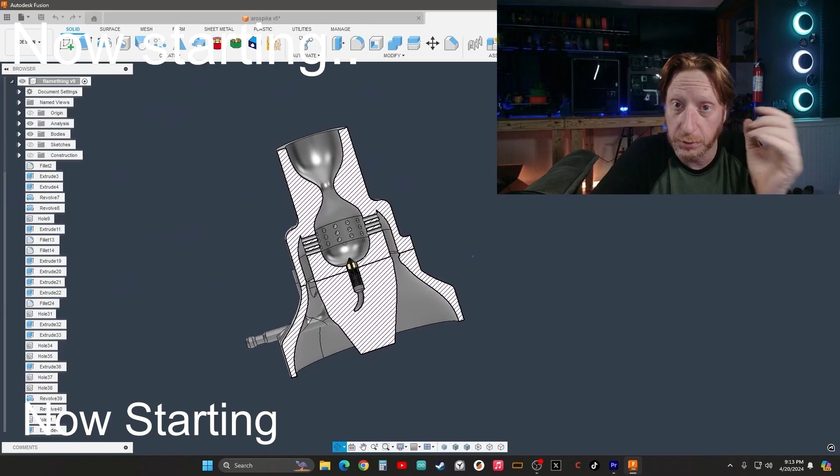Nozzle heats up and the plastic it flows. A creation takes form as the live stream goes. Heart of a maker with a tech-savvy show. Designs in the making, see the hotbed aglow. It's shenanigans 3D on the digital stage. With each layer printed, he's the maker.

Let's start the show. Layer by layer, we watch it grow. A twitch in time with shenanigans flow. Chaos reigns with a fiery glow. We're live. We crash. Watch closely as the filament spins. A wild ride where the line between fails and wins. Accidental art when the plastic rebels. Shenanigans 3D, he's breaking all the levels on the edge of tech. Where the sparks may fly in the streamer's den. There's no limit to the sky.

Every stream's a gamble, roll the fiery dice. Pushing limits, bending rules, not one to think twice. Heartbeat pulses with each print he creates. While the chat's wild wonder in suspense they wait. Rising with the flames in the shenanigans game. Printing out the future, no two prints the same.

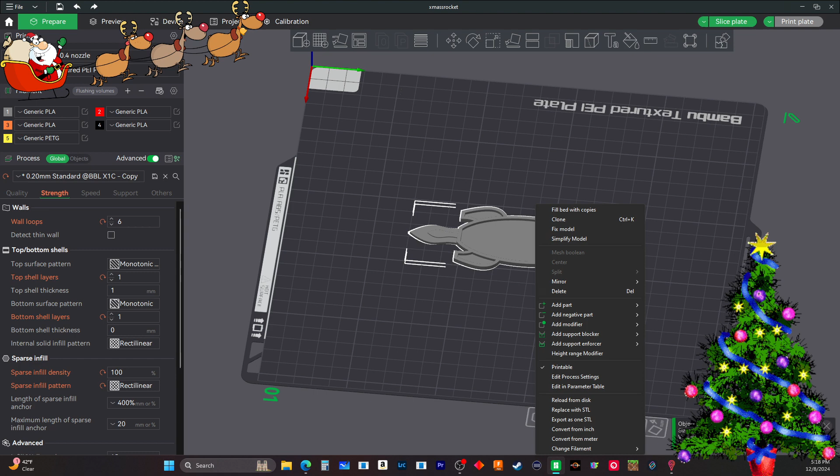Let's get my screen up. We'd have to figure out what kind of board we have to use, though. Would we have to use a board with 2 extruder connections? Would we have to do that? How would we be able to control it? See, this is why I wanted to do the hangout today. Well, I attempted to do the hangout, so again, I apologize.

Completely fell asleep. But...

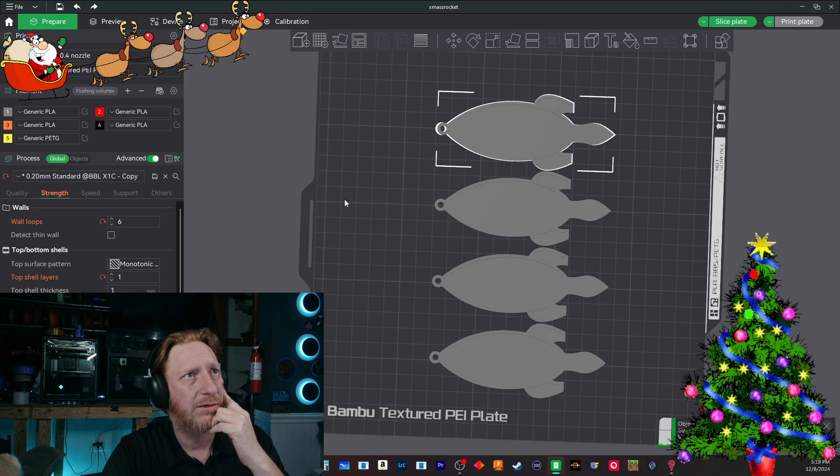Would we need to have a board? Like, what kind of board can we use? We'd have to have a specialized board that has dual extruders. Yeah, extruder is just a stepper motor. But if you look at boards, like in the software, I'm talking about the software end of it. Well, we probably wouldn't. We would probably want to go with Arduino or something, huh?

What orientation did I put these in? That way.

We probably would want to, because we need 2 steppers for the 2 extruders, right? Nick 3DP, use the dual Z motor slot, yeah. We'd probably need 3 slots, right? 2 for each filament, and 1 for the roll to wind the roll up.

It has 3 steppers. Yeah, so we'd need 1 per filament. So there's 2, and then we would just need 1 for the spool to wind it.

Well, we would need to wind it up, right? How are we gonna wind it? How are we gonna put it on the spool? If we have the spool slowly winding to gather up what? Yeah, I don't know.

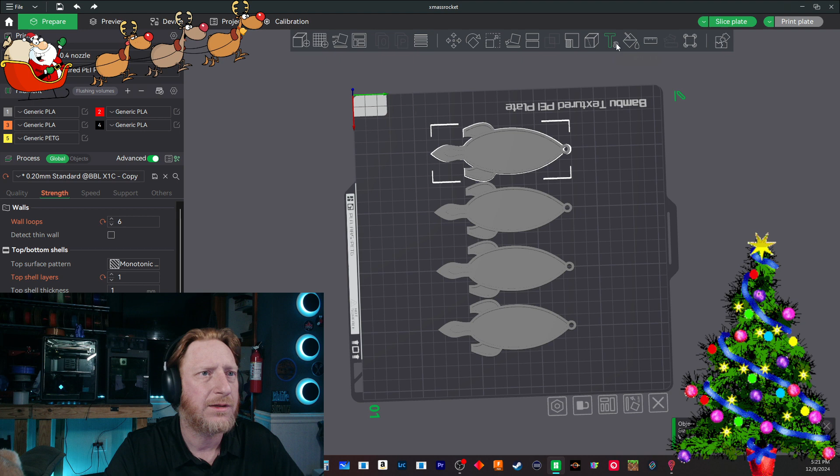The other thing I was thinking about is, how should we cool it? Can we cool it? Should we blast air through it to cool it, like when we pull the extrusion, when we pull the dual colored part, the end of it?

That's a good one. Okay, yeah, show that to me then.

Yeah, the dogs are kind of a little bit wild today for some reason.

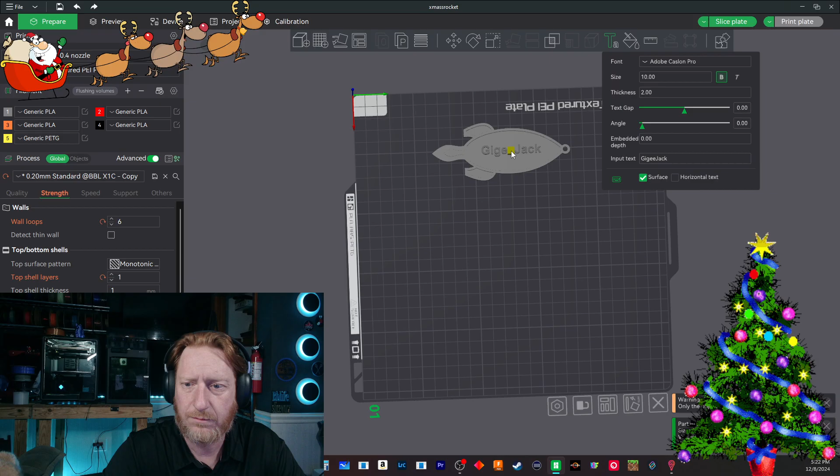Do we need... yeah, I know. So the whole thing is going to come straight down, right? So we're going to have the 2 rolls of the sample filaments that we're going to combine together up on top. It's going to go through the extruder, come straight down. I was thinking about having an air jet kind of cup thing. We'll 3D print an air jet kind of thing, and it'll go down through that to cool it. And then it'll come down.

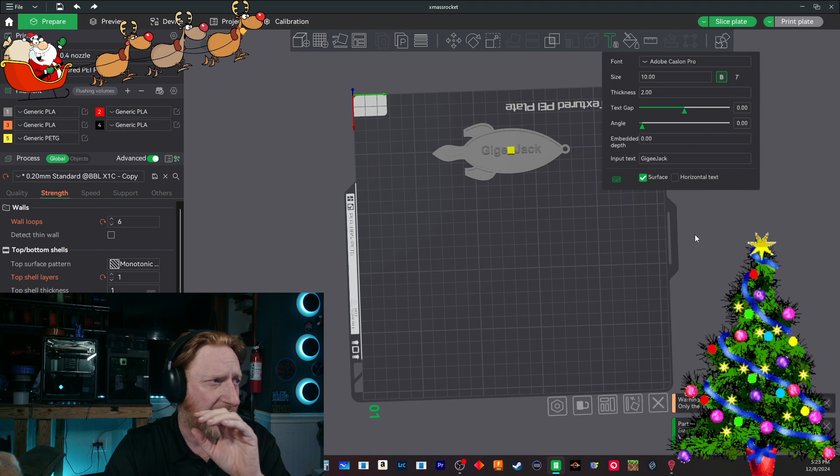I want to have some way of maybe having a 3rd hot end that's not quite fully up to temperature to melt it, but just enough to deform it, so we can push it through that to make sure it's at 1.75, and then from there it'll go into the coil to get wound up.

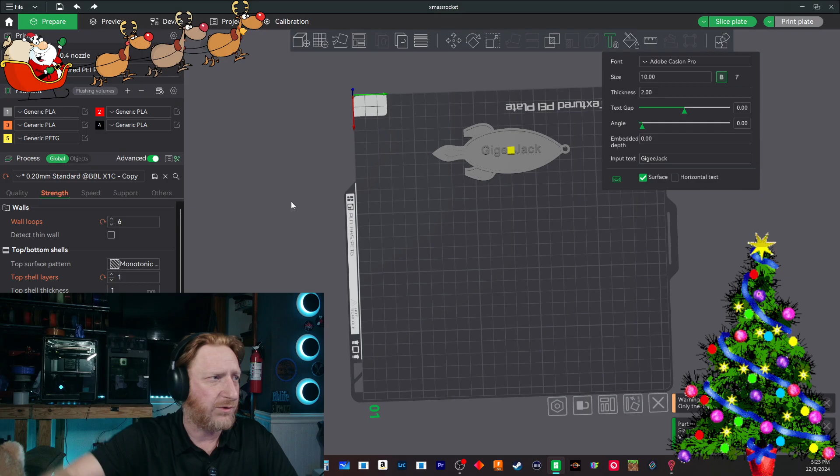So yeah, it's beautiful, I know.

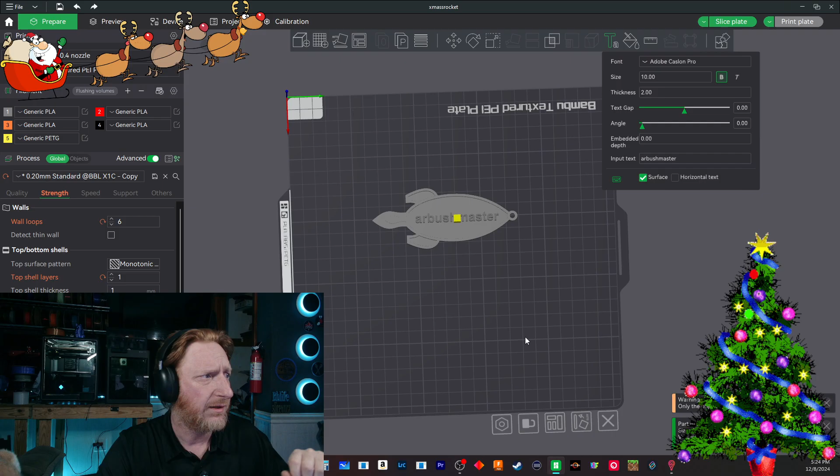Some kind of special rollers to get the diameter right. Yeah, see, what I'm hoping to do is we can use one - they make one, I'm pretty sure. I think they make 1.75 nozzles, and then we can extrude that at 1.75, go through the cooling and go through another hot end, another 1.75 hot end that is just hot enough to deform the plastic a little bit. That's my idea.

And I think instead of using a controller, we could probably just use an Arduino and do that, which means I have everything. The only thing we need to get is the 2-in, 1-out. That would be the only thing we need to get, and I can probably have that here this weekend. They have them on Amazon for like $17.

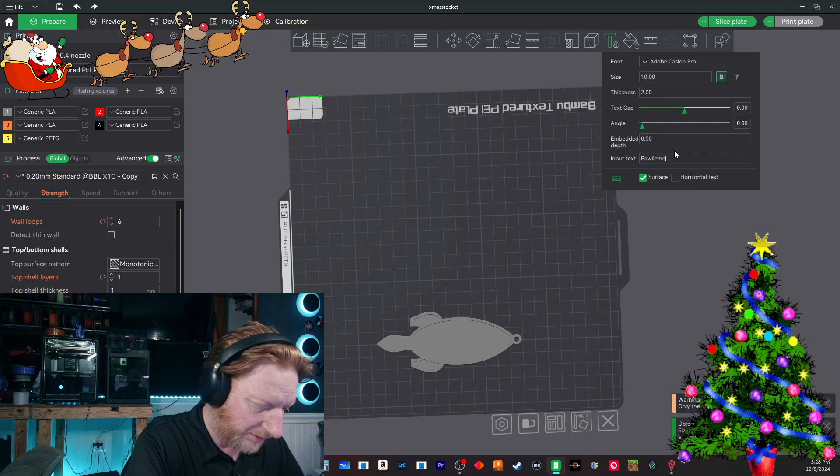So with him saying that it works, I think we should move forward with making a 3D printed xylophone out of Polymaker's new PPS CF.

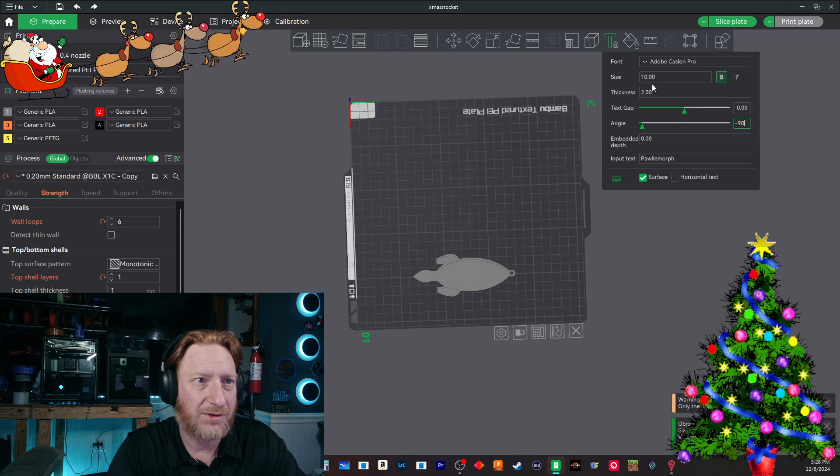What do I have running in the background that's causing my computer to spool up? Well, we'll pause that.

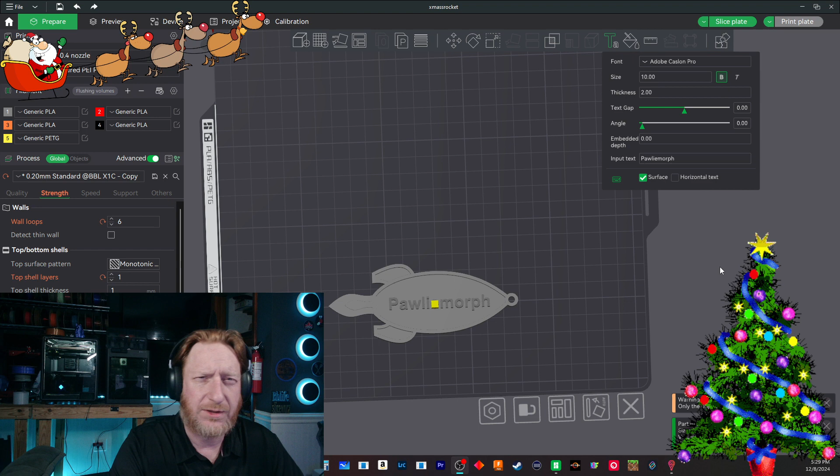I'm downloading a bunch of videos off my YouTube channel, a bunch of shorts. I'm redoing my, we have this 'be right back' screen like that right there. So I'm redoing it. I'm going to have it so it plays, while I'm gone, a bunch of my 3D printing clips, my YouTube shorts on 3D printing. Usually the time lapses and stuff that I did, which I want to do again. I want to get back into doing time lapses. I had a whole entire rig set up. And I think when we move the studio into the bigger room, I'm going to set up a little section.

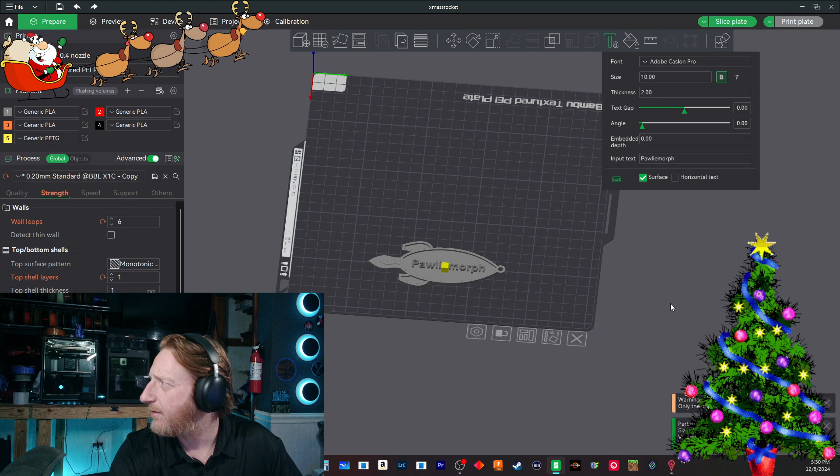I think I'm going to open up, I have a Creality Ender 3 that's still in the box. And I think what I'm going to do is we're going to assemble that, put that together, and rebuild the time lapse setup that I had. Which means I need another Raspberry Pi. That was fully self-automated.

All right, cool. So let's go over here. We got those. To slice the plate.

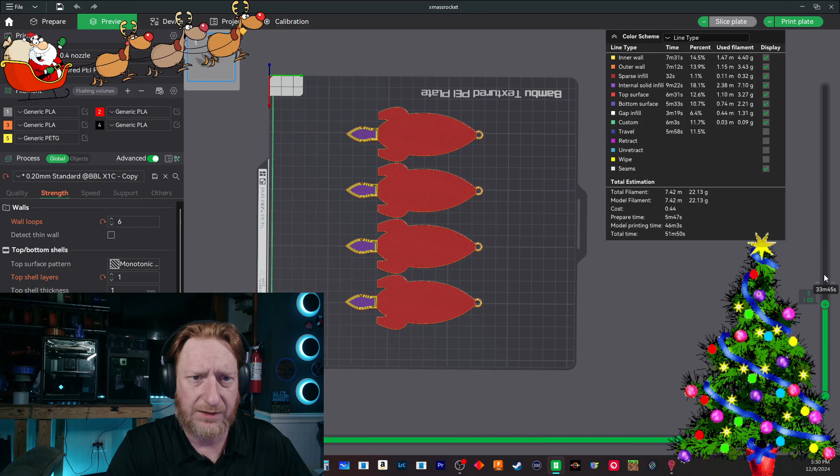All right, now we're gonna add this. I'm all over the place today, aren't I? And what, 11, right? 11, we switch to black.

It's like radio transmission. I don't know if it's like radio transmissions is. I don't know about that. That'd be interesting, huh? I mean, it's all vibrations, right?

Hey, arbushmaster, how are you doing, my friend?

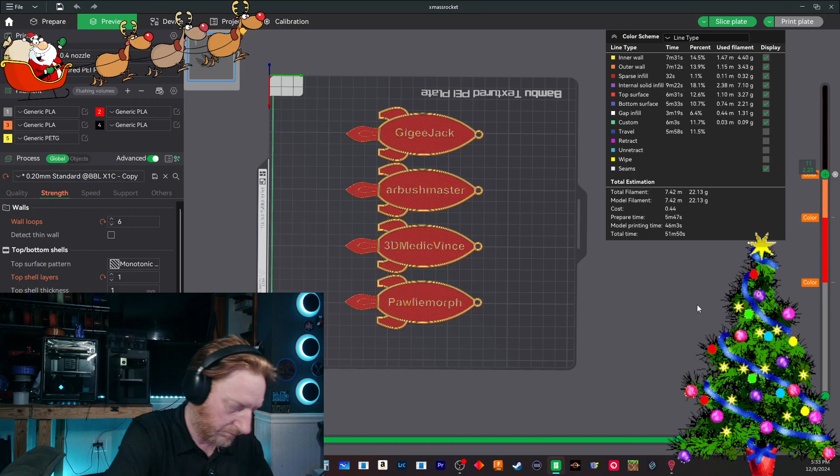I'm gonna get this up on the printer. Yeah, I wanted to get that model started. The print started for that today.

I cannot believe it's almost Christmas. I still have to go shopping for my son, and I have absolutely no idea what to get him this year. Absolutely no idea.

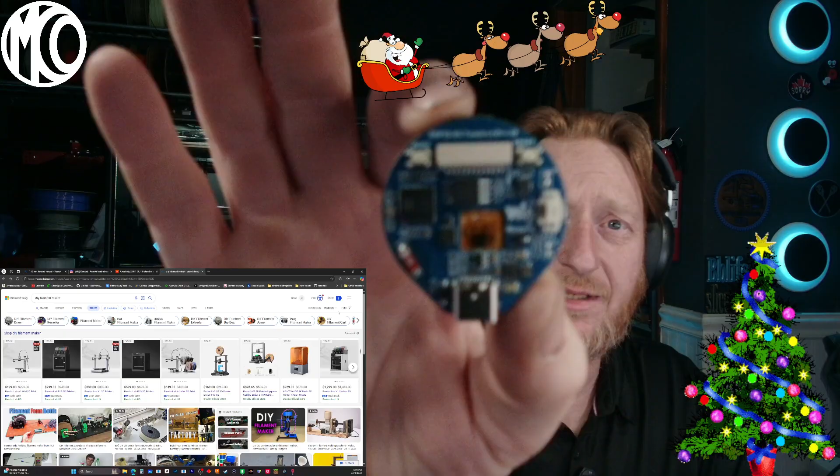Are they pretty thin? This is a 38 millimeter digital display. It's a little different than your normal displays because this one has a built-in ESP32. There's another one they make that has a Raspberry Pi on it instead of an ESP32, a small mini Raspberry Pi. I gave that one away to a tech teacher - when I met him, I handed it to him so he could play around with it.

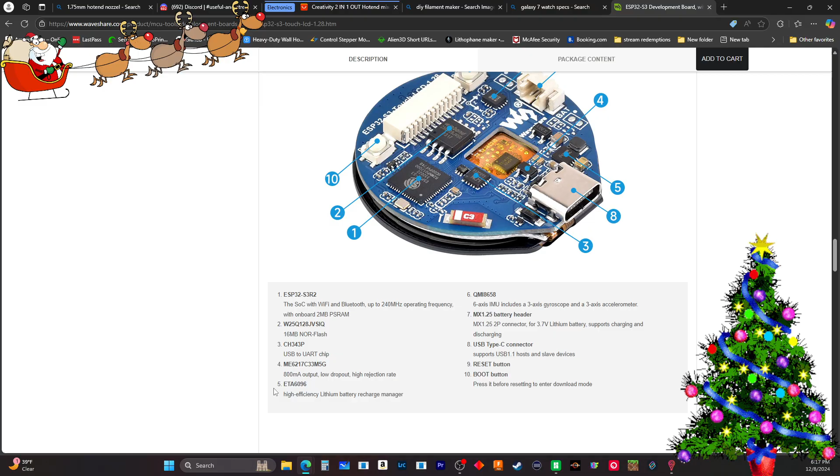Yeah, it's this one right here. But yeah, they have all kinds of stuff. So yeah, WaveShare. There's a couple other things in here, some robotic stuff I've been wanting to look at.

I've been wanting to get my hands on something like this. I printed one of these once, but I'd like to get my hands on something like this, especially this one right here. We'd have to design this ourselves - I wouldn't be able to afford $300 for that, for our tank robot.

You have one that's an ESP32 and an RP. Yes, so I had one of those, I had my hands on one of those. I'm pretty sure that's the same thing we're thinking about. I had two of them - I bought two of these. One was a Raspberry Pi format, and the other one was an ESP32. I gave the one with the Raspberry Pi to a tech teacher I met a few months ago.

Okay, let's get back to our screen here. All right, yeah, there - I like that website.

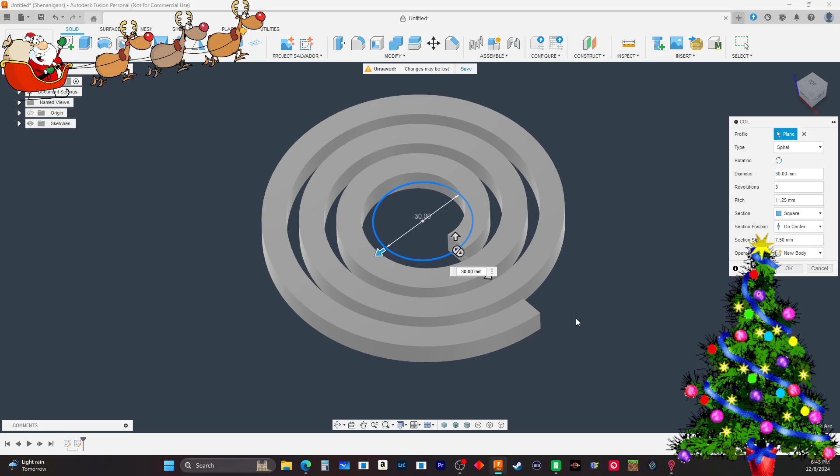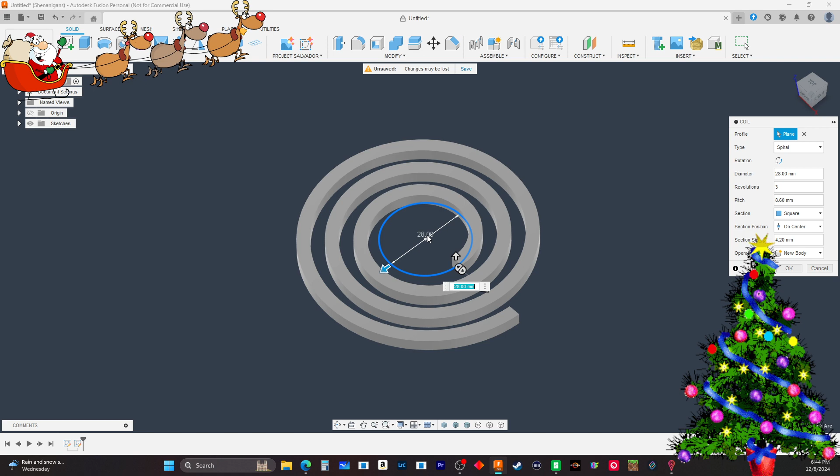All right, section size, we're going to do this. See, this is going to be the little tricky part because there's really no way to adjust this coil. Can you adjust it? Do it that way. Well, what's this do? Does that, and that's the inside. So the inside, we want to keep the inside... oh no, we don't want to do that.

Oh, I messed that up, didn't I? So we'll make a new one on this plane.

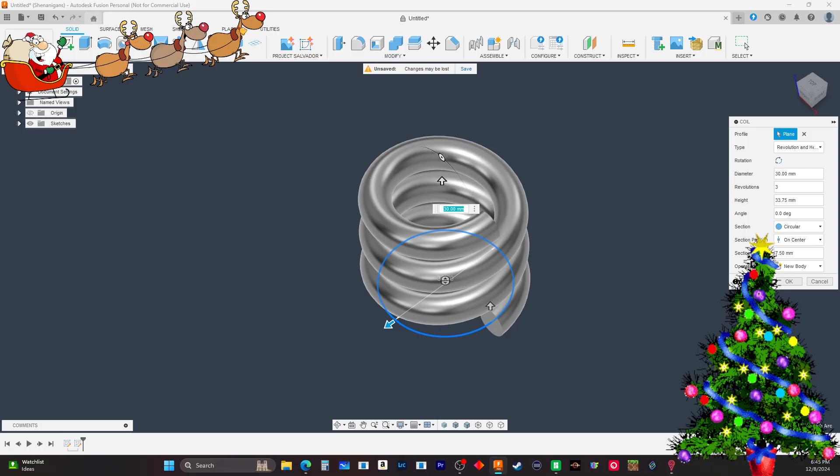I have our local cops, like I have state cops here where I live, but when we go into town, the next town over is a major throughway, and the locals. I had a local cop train Leo, my male. So my male was trained by a canine cop. Yeah, my male dog was trained by a canine trainer for police officer, or for police dogs.

And she was telling me that they don't care about the speed limit. We have a 4-lane bypass, and she was telling me that they don't care, they don't watch for trucks. She said, no, it's 55 through there, and she said you can be doing 65, and we won't even bat an eye at you. And it's just a little stretch, and every time I'm on there, I think of that.

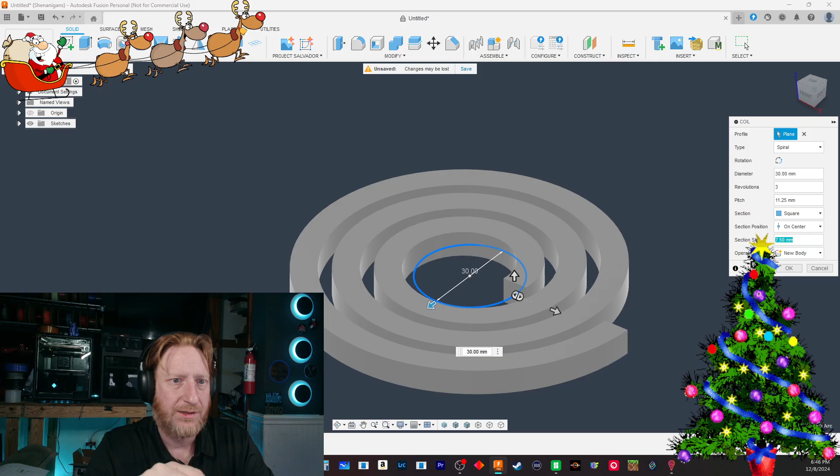How you doing, my friend?

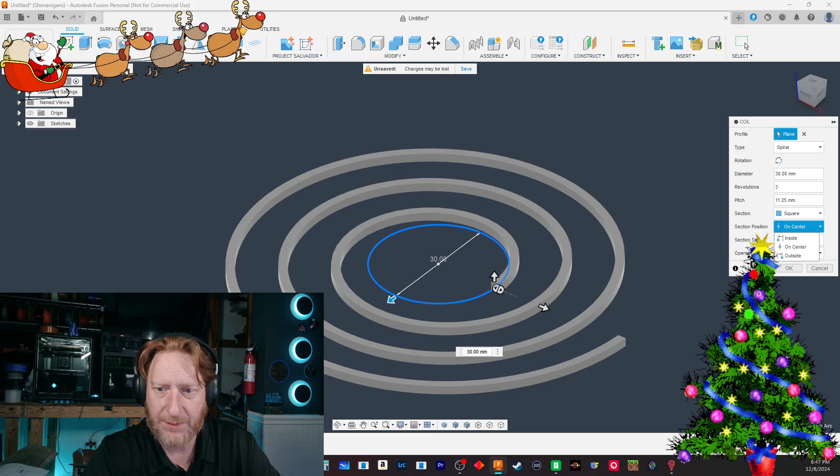We've done the things, we haven't accomplished anything today. No, we haven't accomplished anything. I slept right through a hangout today, and now I'm all behind. We didn't really accomplish anything today. We were talking about it, we have an idea we're going to work on though.

So we're going to try to create our own dual extruded filament. You can 3D print this stuff, but what we're going to do is design a machine. Well, copy a machine basically, that instead of creating its own filament, we're going to change and alter it a little bit to where it's going to take 2 different colors of filament and combine them, extrude into a dual filament and then wind it up. So yeah, we're going to modify something that already exists.

Yeah, well, we're all over the place. Right now we're making a Christmas tree, a light up Christmas tree. We're making one of these, a 3D printed version of one of these, a little mini desktop size.

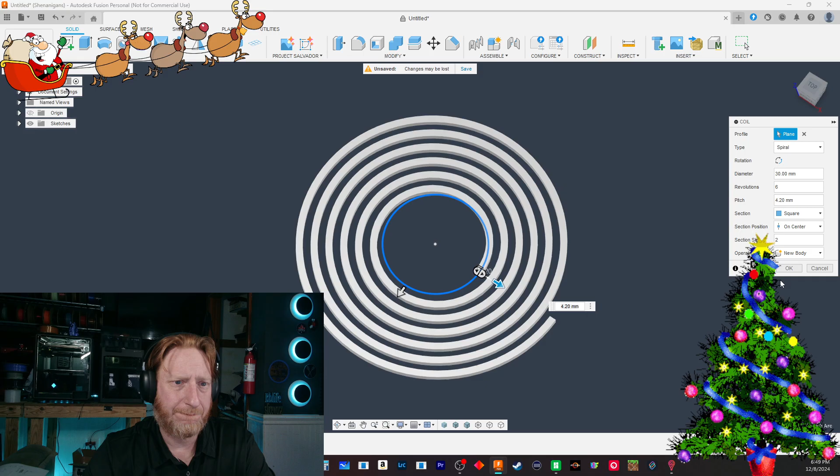We should be good with this. Okay, now, see, this is the important part. Can I extrude this? And it looks like I can. If we're at 2 millimeter already, we only need to bring this up 1 millimeter.

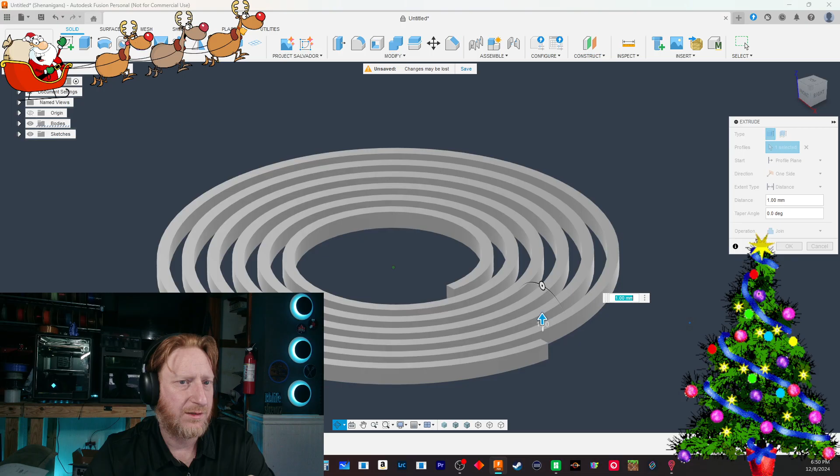Now I want to see, I got to figure out a way to measure this. Let's see if we can measure this. Oh, we can. That's 1,078 millimeters, the length of that. What is that in... go back into 3D scan, 3D print. What?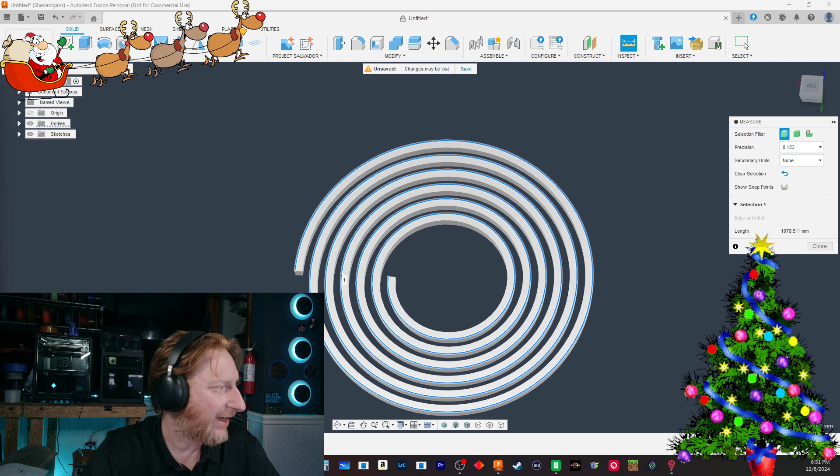Okay, so we're going to use these little guys right here. I want to know how, so we can do a 3 foot and a 3.5 foot. So we'll do a 3 foot. What's 3 foot, 6 foot? How much is 16 feet of this stuff? $52.

All right, so 3 foot to metric is 914.

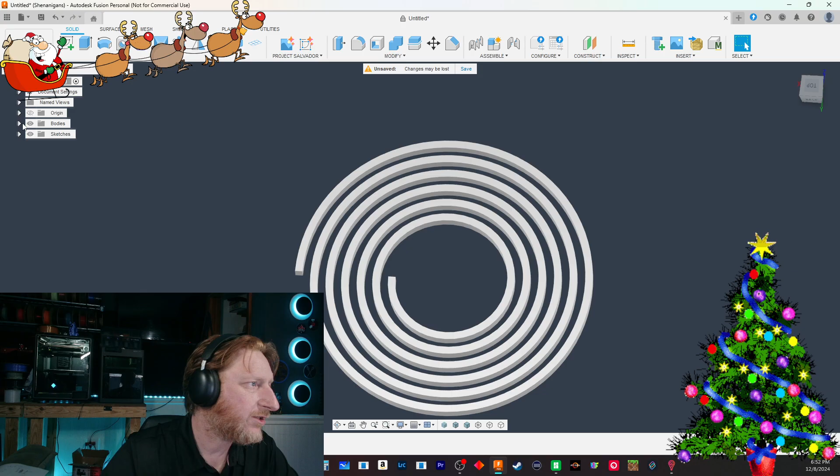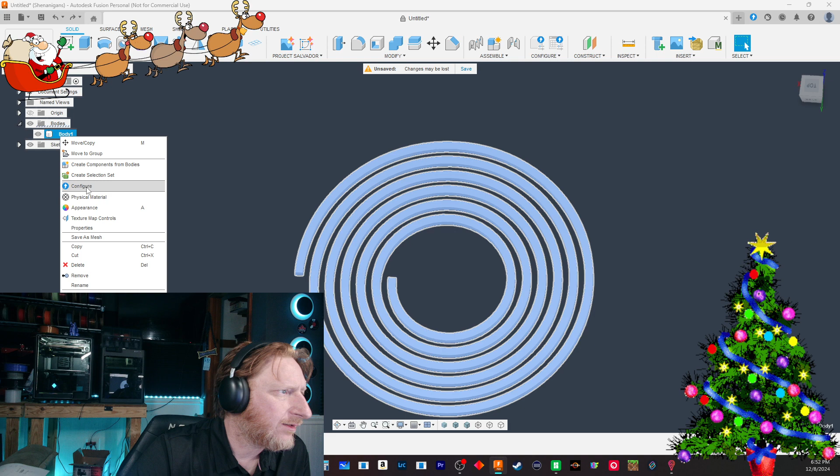So if we go back, can we readjust our... Can we redo this? Configure, can we reconfigure this? Upgrade to Fusion. Oh, we can't configure that. Maybe if we can try to do that.

Nope, nope, I lost that. So there's another thing, that builder bot, that's 2 things I found now that I've lost from switching back to a non-commercial to the free version. There's 2 things that I used that I don't have access to now, which is not really that big of a deal. There's workarounds for it.

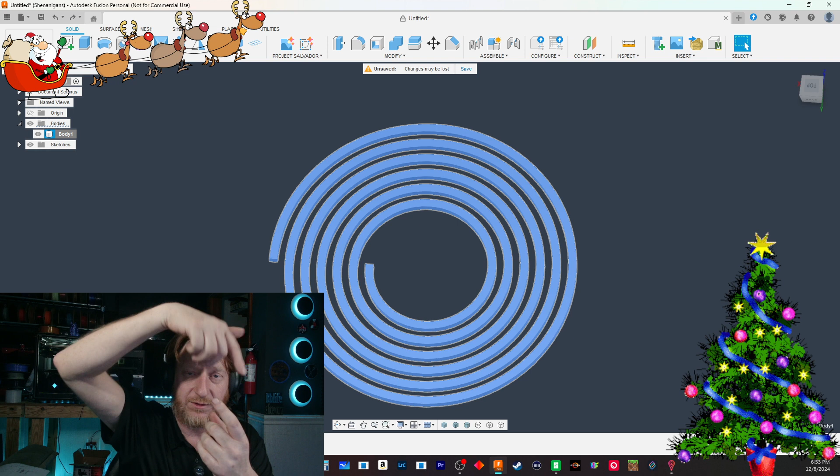Yeah, 3 foot should make a tree. It does. My whole thing is the coil. I'm trying to find out how far 3 foot will go over on the coil. Yeah, no, don't be sorry about that. I'm quite pleased with it, still happy and all that other stuff with that.

Can we edit this sketch? No, we can't. So we will need to go back in our timeline, finish that sketch. Plasticity, I should try that.

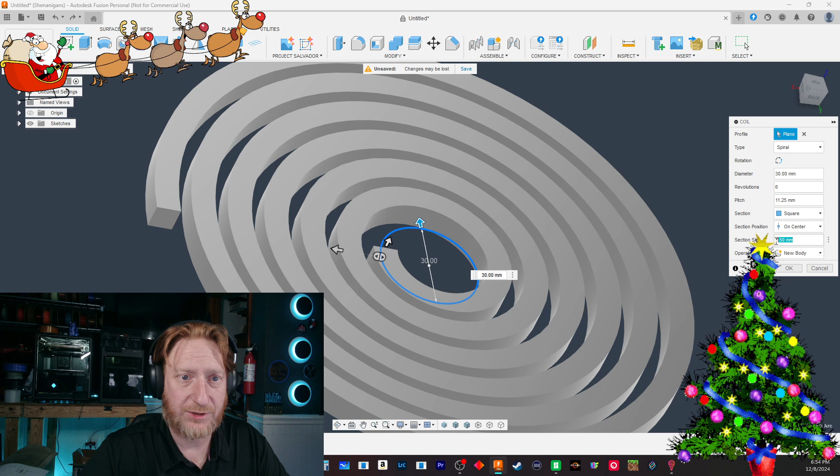So we're just gonna have to make another coil. We did what, 6, right? We did 6. We're doing it at 30 millimeters. Square, spiral, section size is 2 millimeters. Revolutions were 6, let's do 5. Let's bring this coil in.

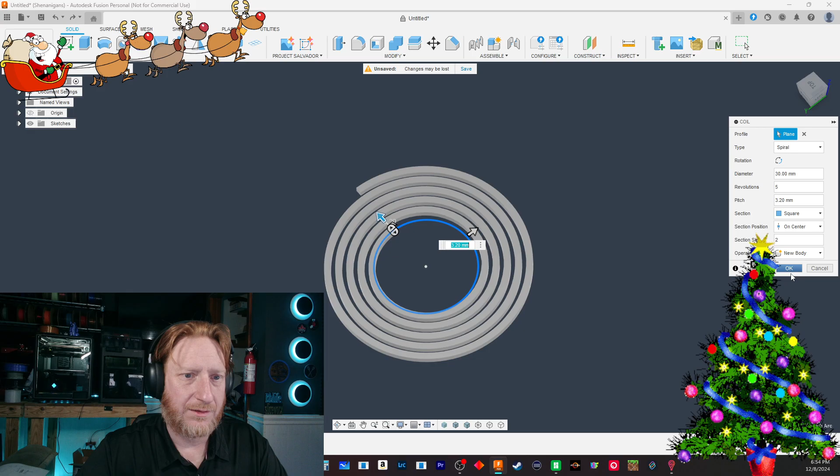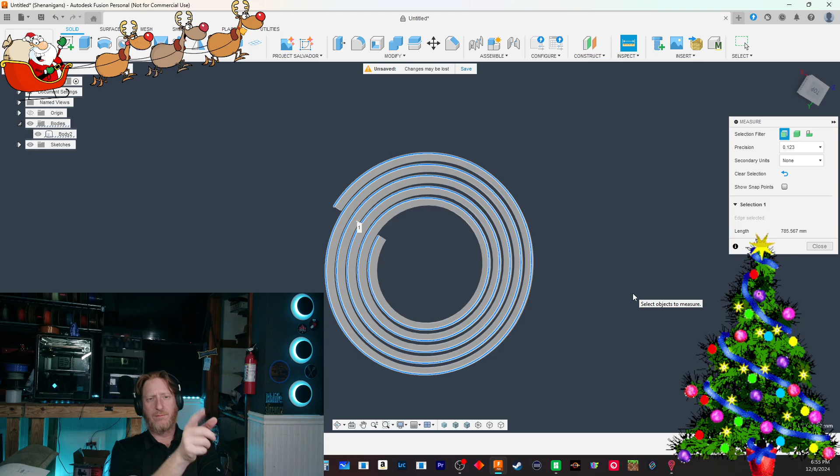So if we do 5, if we revolve 5 times at this particular model with a 30 millimeter in the center, which we're going to probably drop down to 20 millimeter, that little section of LEDs, 3 foot LEDs, will fit on this. We'll have to cut, we'll have some LEDs left over. We'll only have like a little sliver left over, but it will fit, so we can do that.

So the idea of this is print this how it is. Oh, close this out, going to extrude this. I'll print this tonight, actually. We're going to take that to 1 millimeter. I'll print that once. How much longer do we have on the Bambu?

About another 10 more minutes. Yeah, hold on, I'll be right back. Okay. All right, I'm back. Sorry.

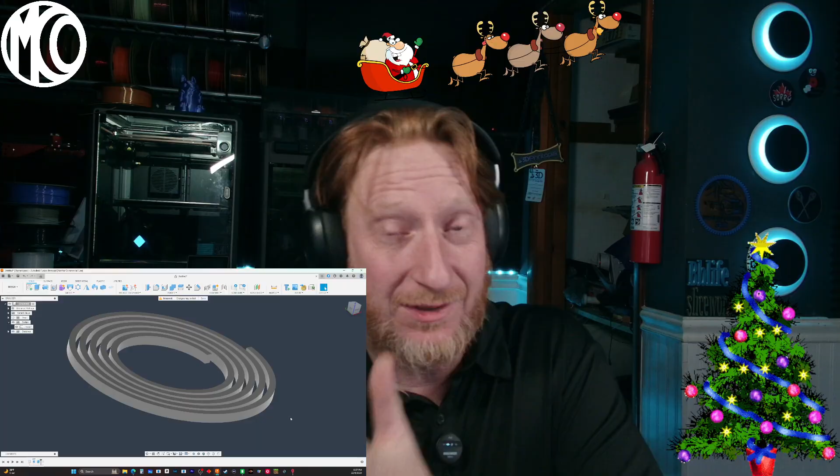You had breakfast for dinner. You know what I miss? My son at school had breakfast for dinner or breakfast for lunch, and he was like, no, he needs to have things done a certain way. But he was like, what? Oh, I keep trying to get him to eat pineapples and ham on pizza, and he will not touch it. He's never tried it, but he won't touch it. So it has to be, I guess, if you love pineapples on your pizza, I guess you have to be born with it. I guess it's something that's just shoved into your brain when you're a kid or something. I don't know, smart kid. I like it, I like it.

Pineapple goes with ham. Yeah.

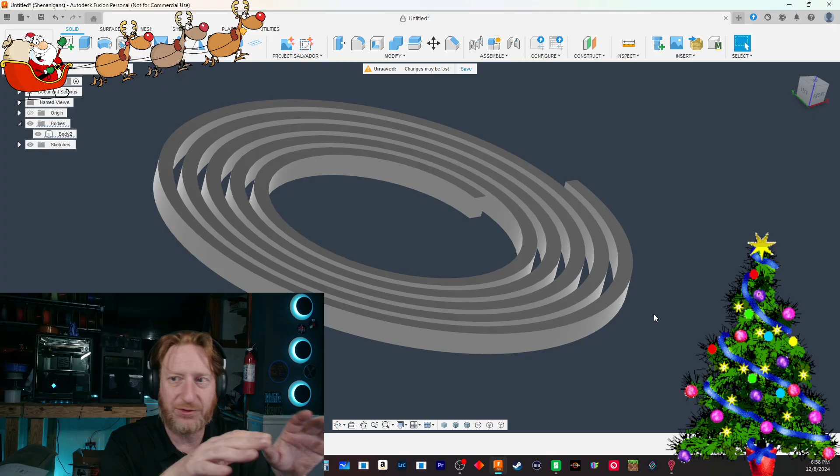So the idea we have here is to print this coil out, and then take it, like the tree, right? I think it tastes good. It is, exactly, I think it tastes good.

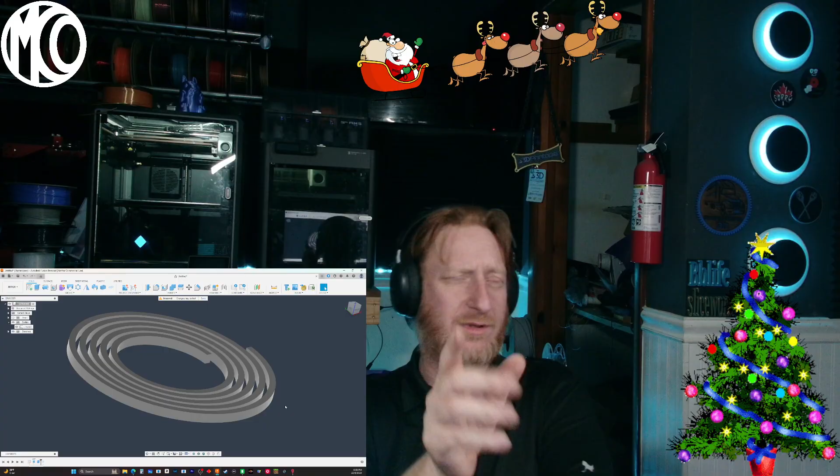The only issue I see with this is we're probably going to have to take a hair dryer to it or something, heat it up and pull. I can probably just heat up the build plate, let it sit on the build plate for a little bit, let it warm up, flip it like a pancake, and then be able to pull it out and allow it to cool, and it should maintain its shape.

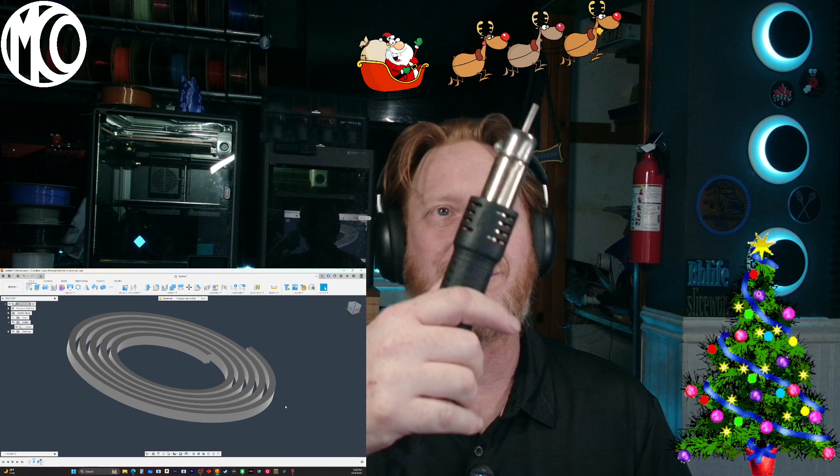No, I don't have a heat gun. Well, I do, it's a little tinny handheld heat gun, so I guess I can use that. Oh no, I got this, what the heck am I thinking about, I got this, we can just use this. So yeah, I do have a heat gun. I was thinking of a heat gun for stripping paint, one of the big ones. I don't have one of those, but I got this. Just fire up the rocket engine now, do it.

We need to bring this in closer, this part right here. This needs to be brought in closer because we need to make a... Can we create a cylinder in here? Yes, we can, I've never done that before in here.

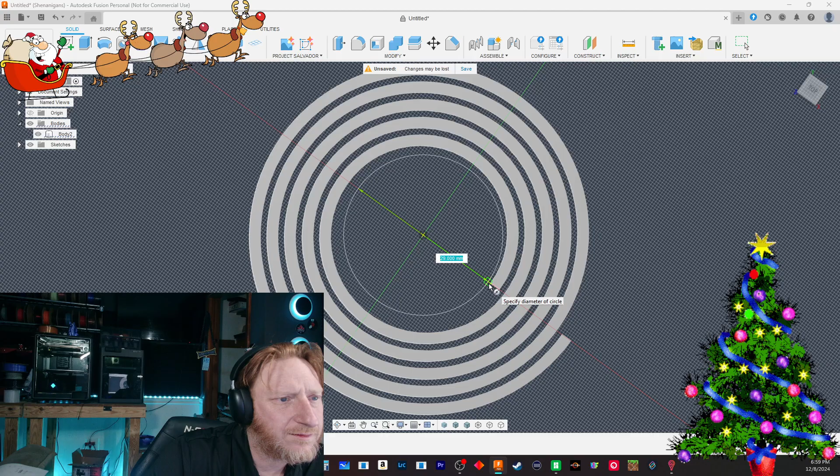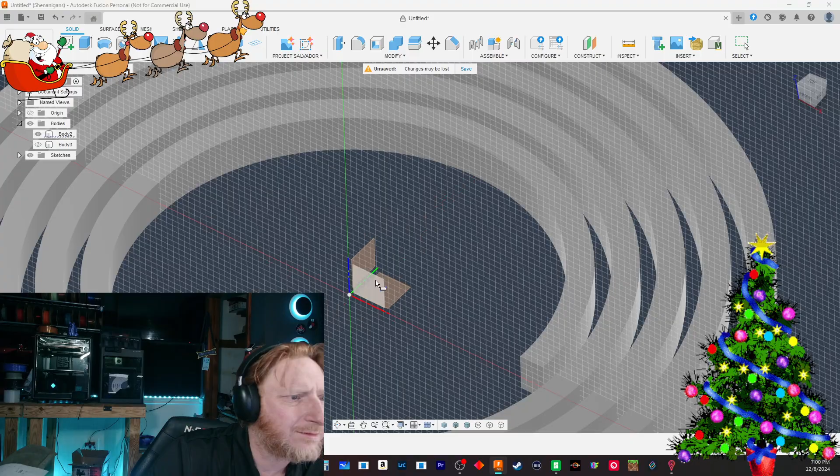I've never used a primitive in this, that's kind of nice and handy. What else, what other primitives do we have? We have a box. Even when I was doing FreeCAD, I'd never used primitives. Oh, you can cut with this too. I've always just went straight to sketching.

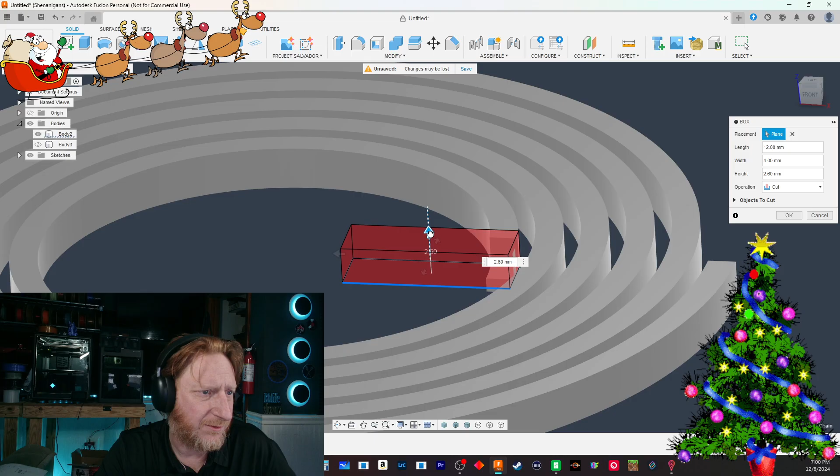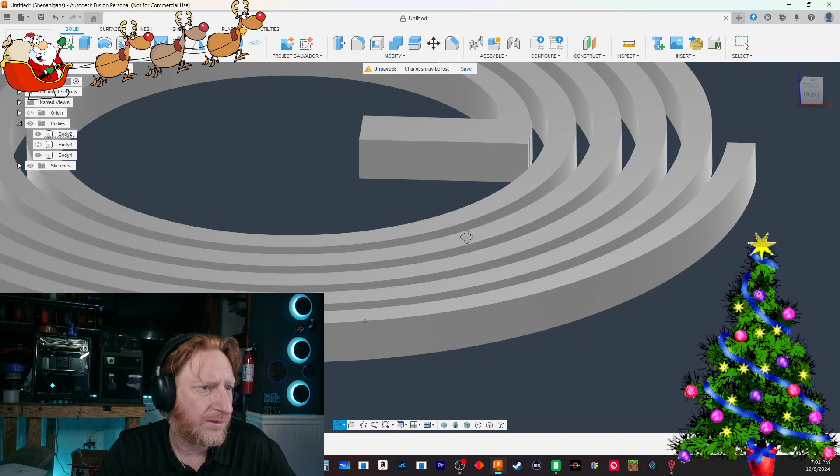Oh, what the heck's going on here? That coil's sitting down, that coil's down. So let's do a new body for that one, and we need to move it down. That's still not moved the whole way down, but anyway, you get the idea.

Yeah, low heat hair dryer. Yeah, we got the tools here, so yeah, we got stuff.

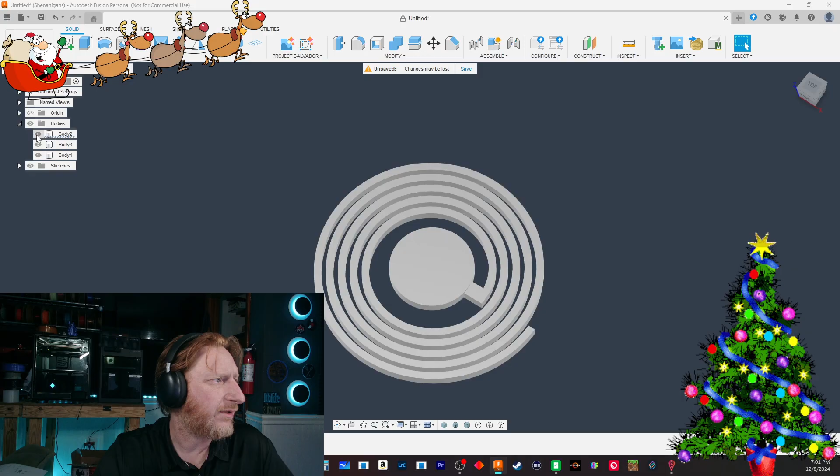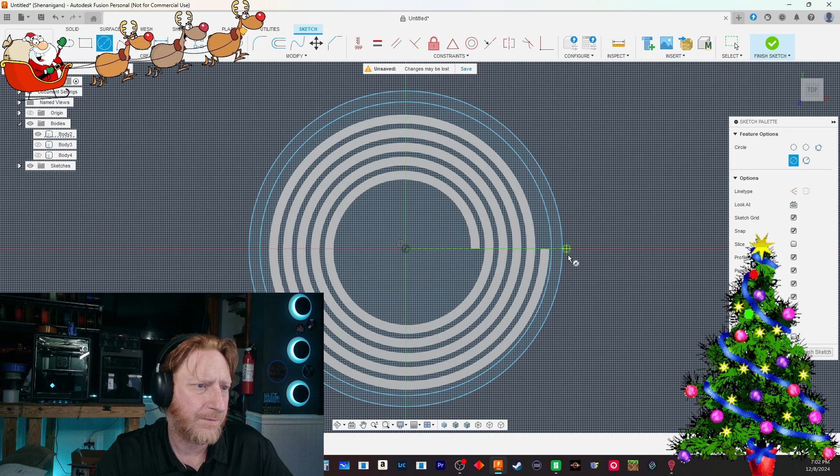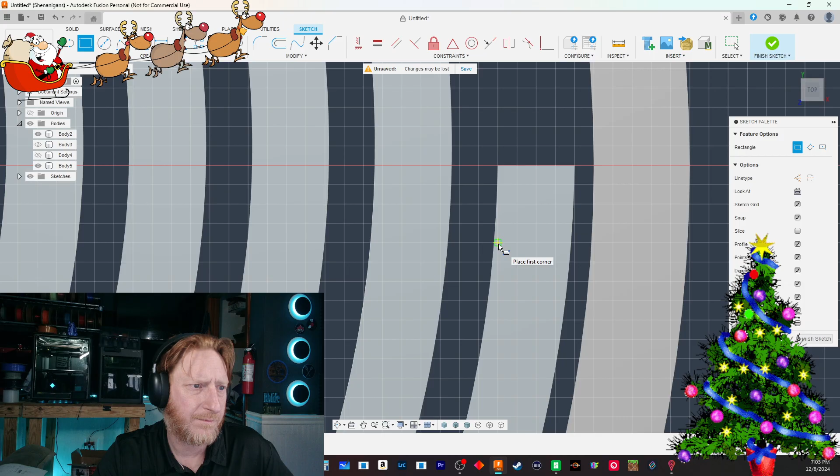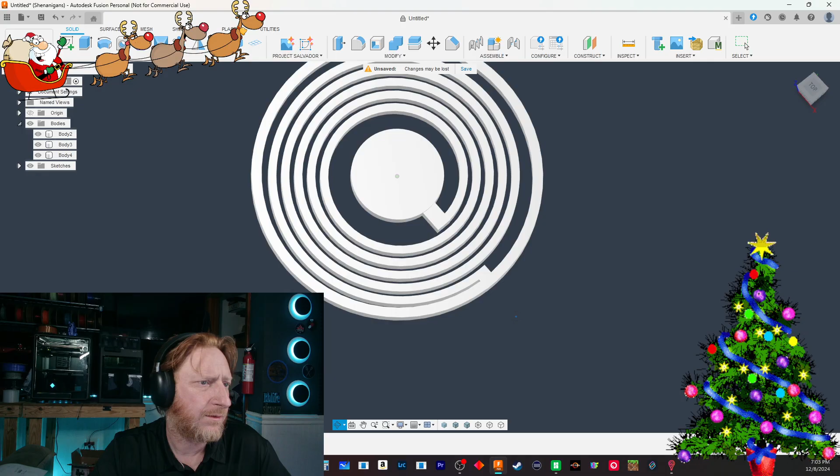What I'll do is I'll blend this in when we actually make the real one. This is just tinkering around, just kind of brainstorming, but we'll make it so it's a smooth transition into this. We'll finish that sketch. So something like that, right?

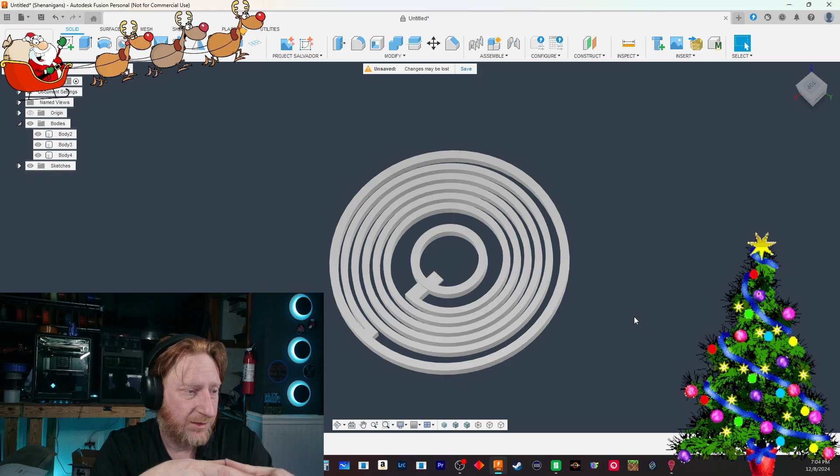This is just a rough idea, just brainstorming like I said. So this will be the center, we'll have to get, like, maybe use a dowel rod, or maybe we can 3D print it, depends on how far we can get this coil. We can probably 3D print a base for this, and 3D print, maybe, how high do we probably have to use it on the K1 Max.

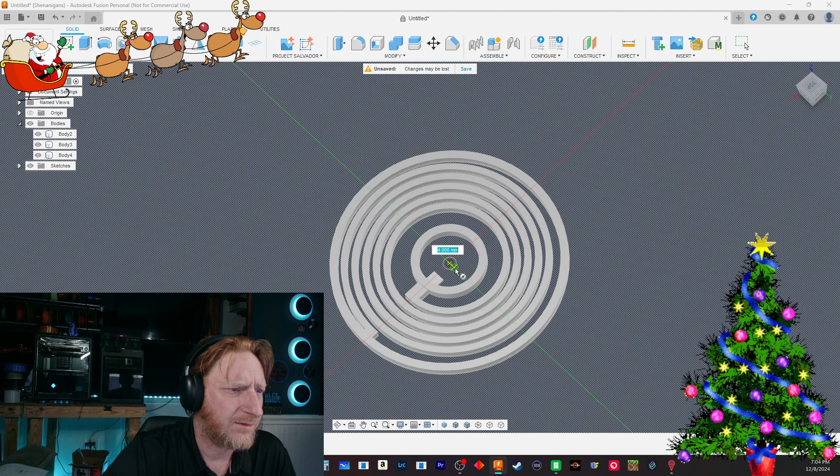Yeah, we'll just put a cylinder here. Oh, that's not going to be that tall. So we could probably do something like that. I wonder if that would work.

Then I found some very small, tiny micro LEDs.

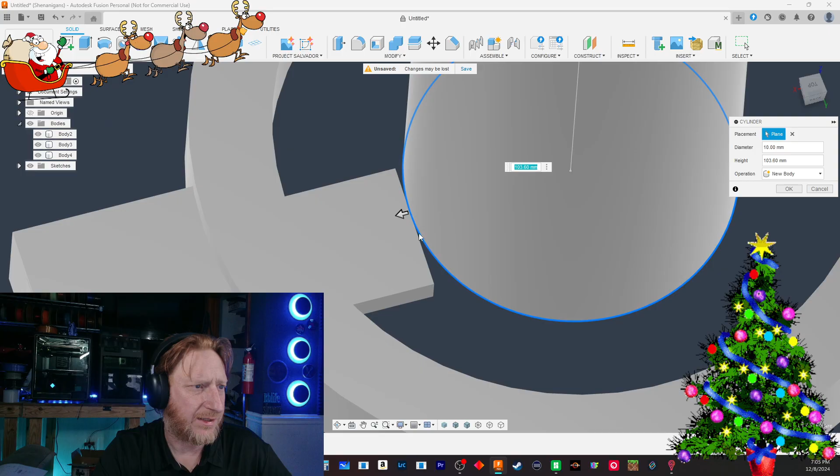So obviously we'd have to print that separately. Yeah, we can do a base and print that separate, so probably maybe 100 mil, yeah, we can probably make it about the size of this. Because those LEDs, those LED strips are only... what is it, 2.7? Those LED strips are only that freaking big, they're tiny, tiny, tiny little things.

They are. Well, they're about as thick as that, about as thick as this. This is like just a little over 2 millimeters, so they're about as thick as those.

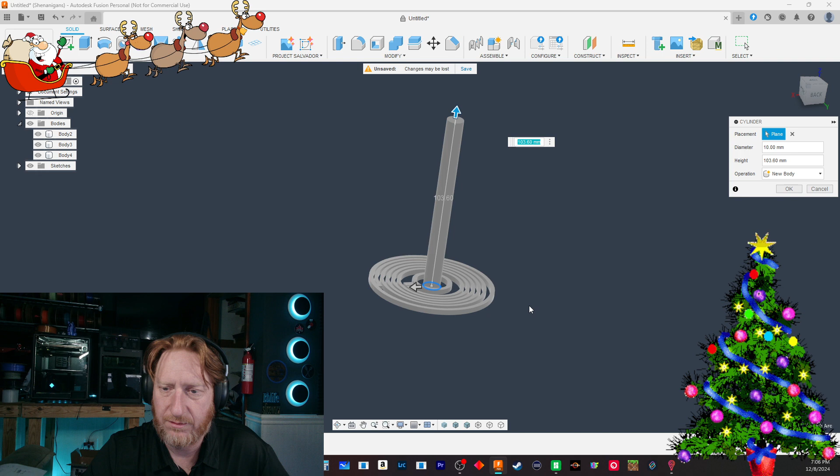Using the threading option and change the pitch. Oh, cancel that. Are you talking about making... Oh, that's a pipe, what am I doing to pipes?

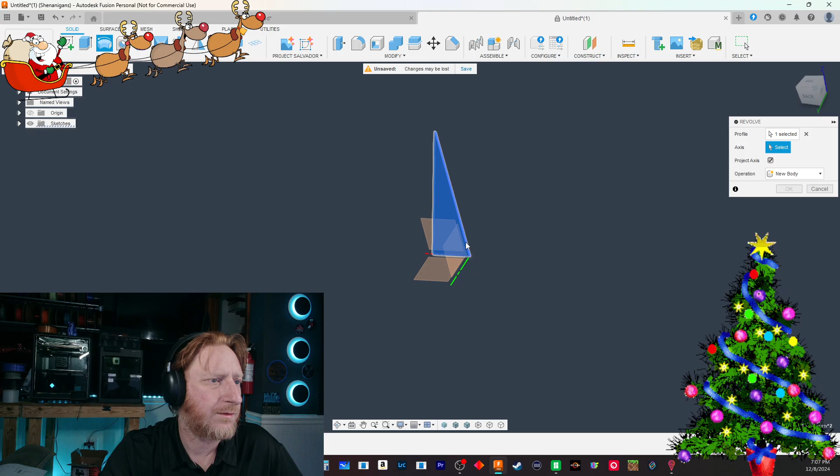Oh, we can't do that. I'm not sure, I think I understand what you're saying, but I don't think I've ever tried that, I'd have to... I haven't played around with threads too much, I'd have to watch a couple of videos on how to do the whole threading. I've messed around with threading before, which is simple little threads. Cancel all this.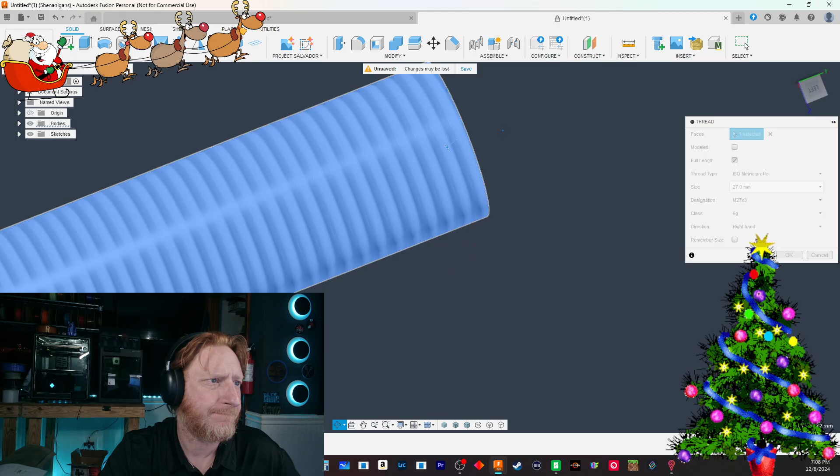How do we get the bottom wide? We're entering into an area of fusion that I don't do too often, so I definitely would have to look this one up.

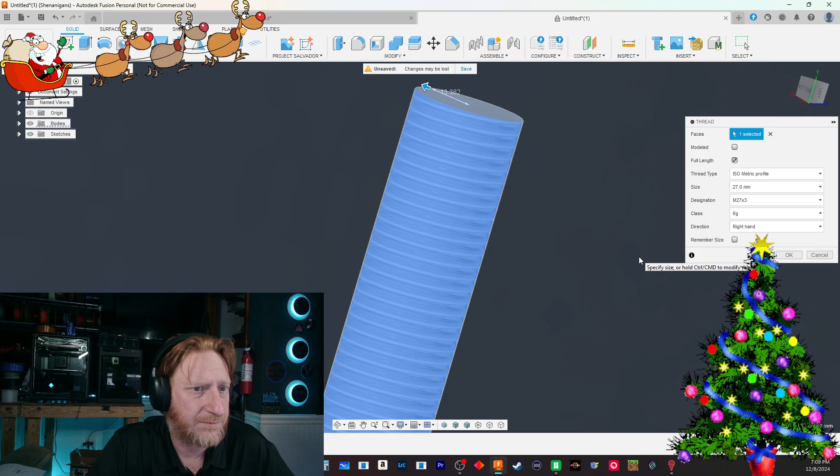Making a screw and taking out the center. How do we do that? I can make this, but how would I get the bottom wide and the top to a point?

Yeah, are you doing a stream tonight?

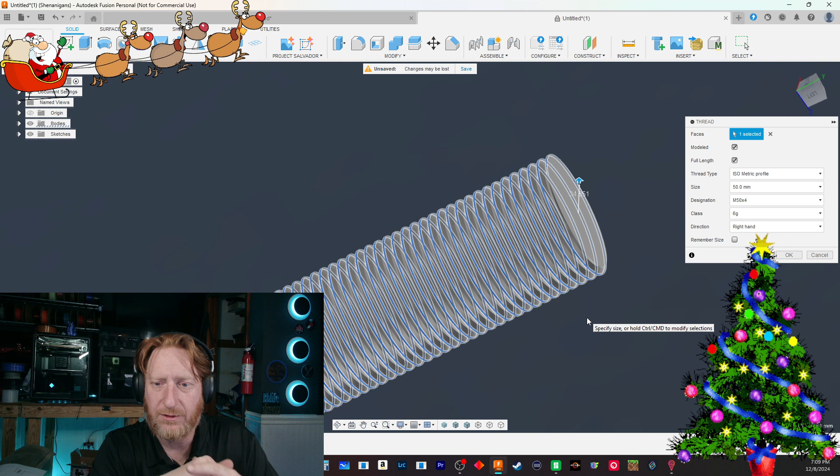That's my thing. How would we make it into a tree shape? I can get this far right here, I can get to this far. Like yes, I made a screw, but then how would I make it?

Okay, a bolt. All right, the bolt.

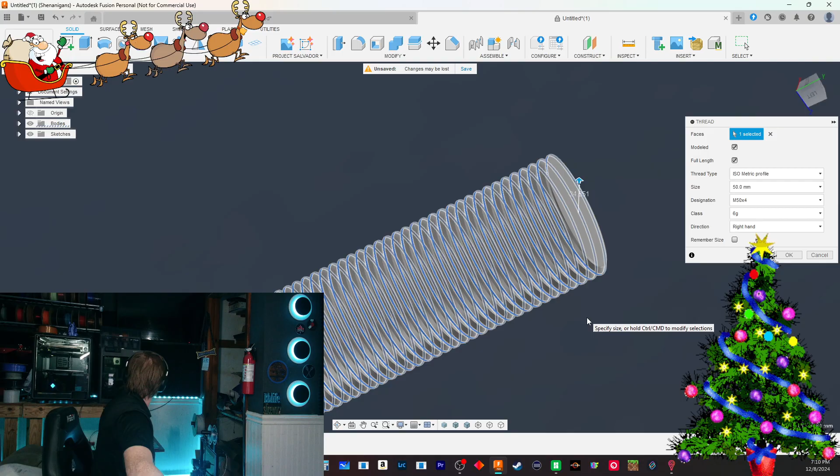All right, so we got the second round of the redemptions printed.

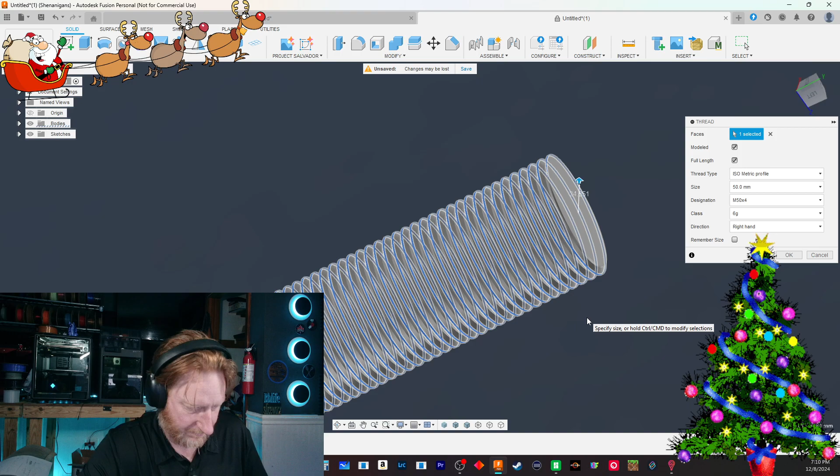Yeah, I'm still learning Fusion myself, so... I wonder if I can do it in FreeCAD. You need to make a screw. I'm lost, I'll figure it out.

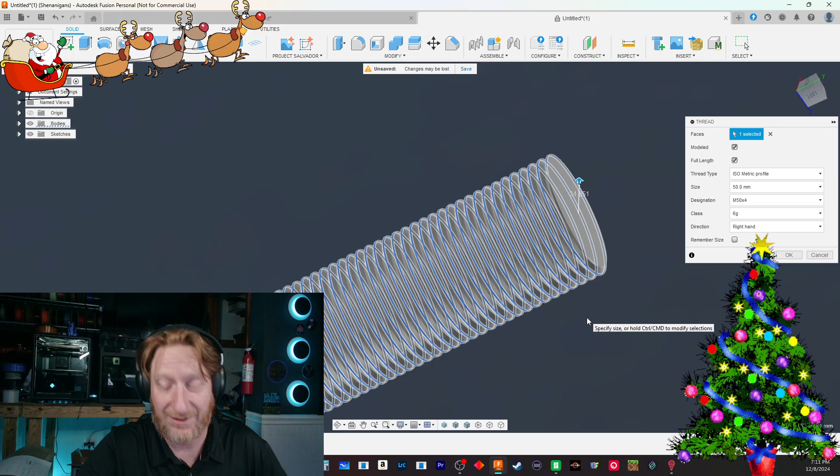We got Gigi Jacks done. Let's go to the big screen. Gigi Jack, these are probably going to go up on Tuesday. We'll probably put the tree up tomorrow with my boy, 3D Medic Vince.

Polymorph. Bushmaster. We got Ramon. And we got that robot, Text Jeeper. Awesome, cool.

I got to do one for myself, I got my son in there. But that's what we got for our redemption so far, and we got a bunch more days. So remember, if you don't have one, if you didn't see your name on there, hit that redemption down during stream.

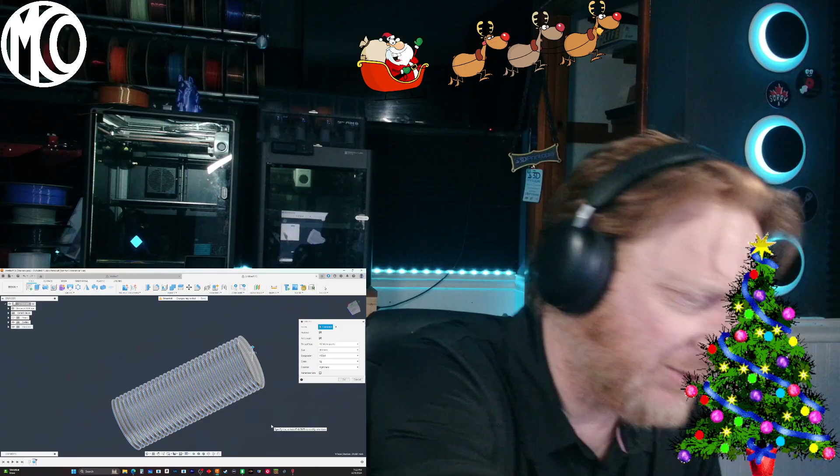Yeah, I'm just doing them all the same color until I run out of color, then I'll switch. I know last year we did where y'all had the chance to pick your colors, but I'm trying to keep it simple, so it's a nice, simple, easy print, right? Nice and quick, we can do a whole bunch of them because I was printing like crazy with the colored ones, it was just taking a bunch of time. So yeah, we'll keep them all this color until we run out of that color, which I think I have enough of, so we'll keep them uniform today this year.

I see what you guys are trying to do here. How do we make a screw though?

I'll definitely, this is something, all right, Butterbot.

Animals got green and people got blue?

Yeah, I see what you're talking about, making a coil and printing it like that. Yeah, I do see that, I have to figure out how to do that though. We stumbled across a thing that I don't really understand quite yet.

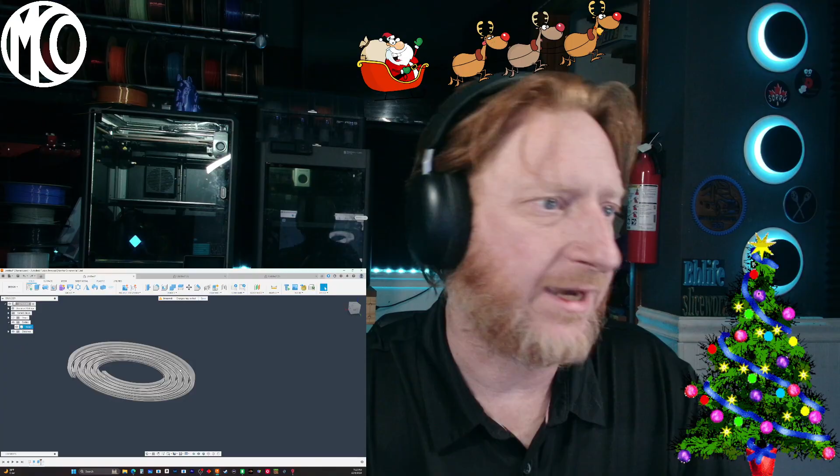Okay. Let's send this off to the printer and see what this does.

All right, we're probably going to have to print this solid, I would say.

We're going to send this off to the printer, and then we're going to call it a night. I got to get up and leave for work in 3 hours. That's going to take 14 minutes to print, which is great, because then that way I can take a look at it when I wake up.

Let's get some glue on this one. Oh, they're purple now. Oh, that didn't go in correctly.